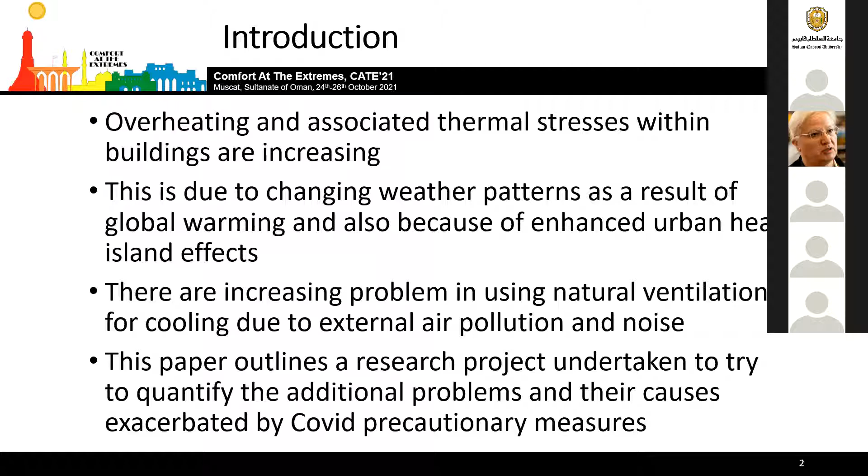What we're trying to present in this paper is an outline of a research project that we've tried to use to quantify the additional problems and their causes, exacerbated by the COVID precautionary measures. I think this really arises from the fact that although we've got various design techniques that can deal with overheating, when you add in the extra problems caused by COVID, this exacerbates the problems and can lead to very big difficulties.

Even before the COVID pandemic, concerns were being raised in the UK, and there were a number of other groups working on the area of potential overheating risk. It was pleasing to see the government had started some consultations on this. Unfortunately, I feel that maybe some of those improvements have stalled a little, and perhaps we're a little too cautious in the way we're dealing with this, which is why we instigated this project a year or so ago.

Already in the UK, we do have a number of analytical methods for trying to assess the problem of overheating, such as Technical Memorandum 59 from the CIBSE, the Chartered Institute of Building Services Engineers, which considers design methodology for the assessment of overheating risk.

But quite often the inputs to those overheating risk methods are based on a standard set of assumptions, which, when you add in the effect of COVID, were not really valid anymore and might lead to erroneous outcomes. So this is really why these assessment techniques, which were designed for a different set of circumstances, run the risk of not dealing properly with circumstances where we have COVID as well.

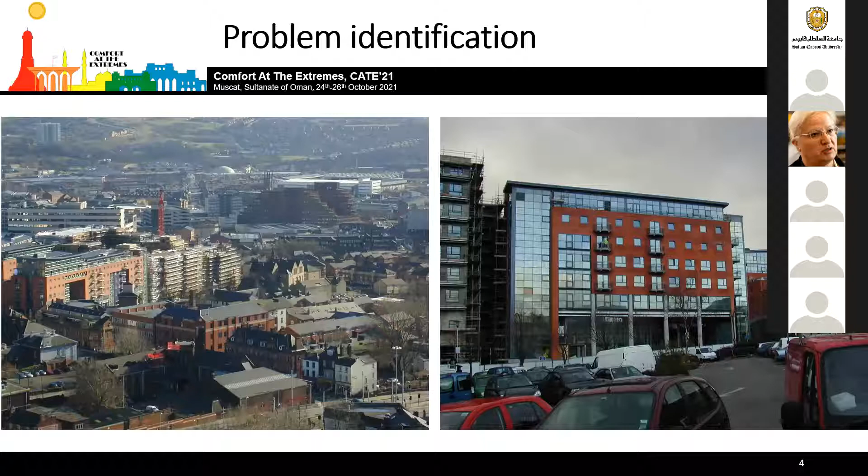Now, the sorts of buildings where we were most concerned were apartment blocks, the kind of building where it doesn't have to be very large, but one where a family might be located surrounded by other apartments, each of which would also be experiencing some kind of overheating. This, combined with the impact of perhaps single-sided ventilation and lack of air conditioning, which is very common in apartment blocks in the UK, would mean an increased risk of overheating in those apartments, particularly when we add in some additional factors.

Isolating at home meant there were some additional difficulties. More members of the family likely to be in the home for much longer periods, 23 to 24 hours indeed. And this, adding together with the additional heat gains that they would generate and the lack of availability of ventilation, led to a number of different problems.

Additional heat gains coming from more cooking, more use of appliances, and limited ability to cool the building from natural ventilation means, partly due to safety and security restrictions on openings. It's very common, in fact, for buildings in the UK that are apartment blocks to have restrictions on the size of the window that can be opened, thus limiting natural ventilation.

The reason for that is that it becomes a risk of somebody falling out. And in fact, we actually had somebody in our locality, a child fall from a window in an apartment block recently. So the reason for keeping those windows secure is very important. But also security, people becoming more concerned by the risks of burglary and other matters.

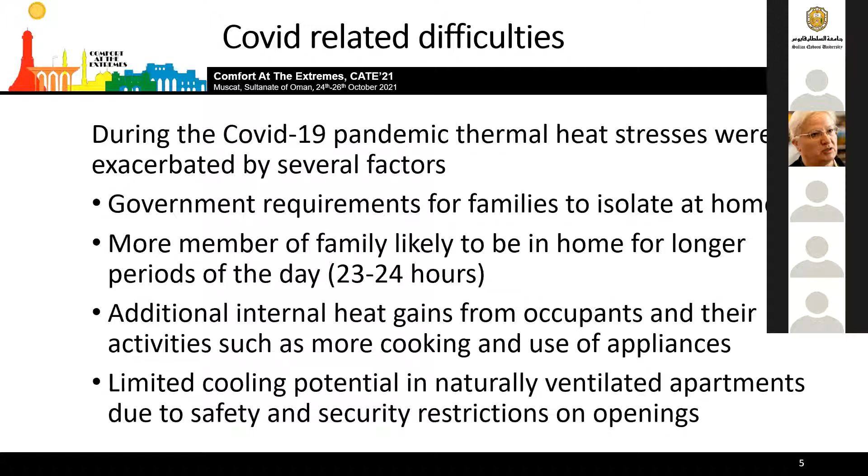So in order to carry out the analyses, which could identify greater detail from the impacting issues, we instigated a parametric study in which a number of different key features of the building apartment was varied.

We considered that the apartments would be ones in which they would be surrounded on all but one side. The side not surrounded is of course the one with the windows, the openings in it, but the other 5 sides of the building, the top, bottom, 2 sides and the back, would all be surrounded with temperatures at a similar level. We considered 1 and 2 bedroom apartments with typically 2 and 4 occupants.

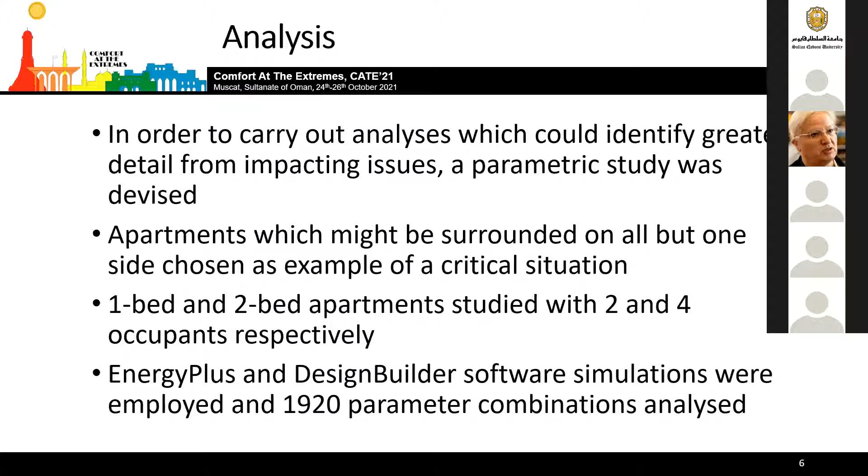And we used the programs EnergyPlus and DesignBuilder to carry out the simulations. And in total for this particular set of circumstances, we had 1,920 parameter combinations that were analysed.

The building we chose was not an extravagant one, it's quite a typical one, about 12 stories in height. We considered apartments situated facing each of the 4 principal directions, north, south, east and west. And we considered apartments on 2 different floor levels, the 2nd floor level and then the top floor level. Typically we had a 12-story building for this.

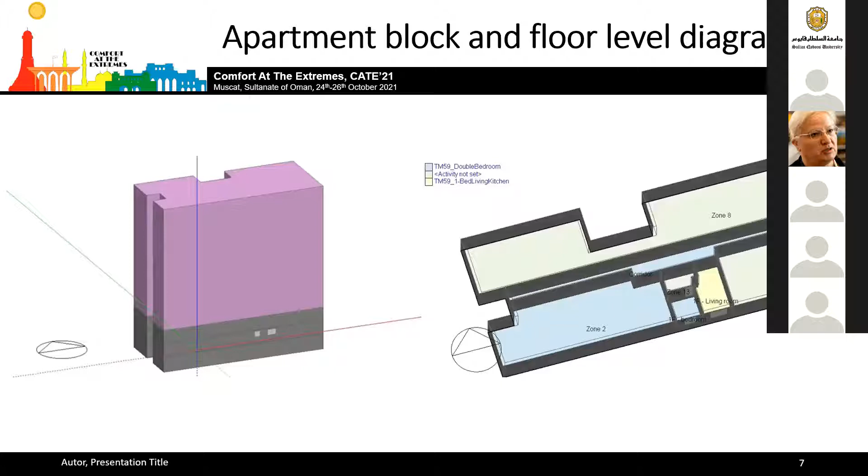One of the benefits of using an apartment block like this with multiple apartment options in it was actually in carrying out the simulations. We could carry out more than one simulation at a time by using different facades of the building and by using different floor levels. The reason why the 2nd floor was chosen is this represented an area where perhaps there was restricted ventilation because of surrounding buildings, and the top floor because it was more exposed to heat gain from the sun above.

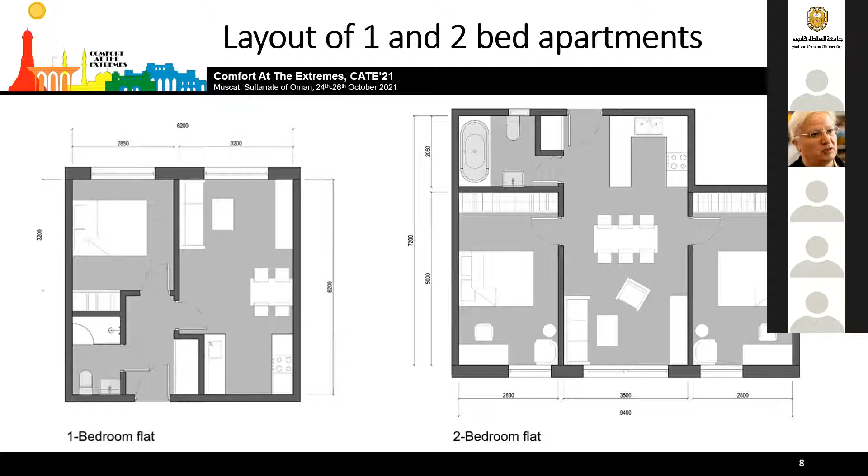The basic parameters for the layout of the apartments were chosen from a number of sources where apartments were described and instigated and used in real buildings. The 1-bedroom flat you can see on the left here has a window in the bedroom and a window in the combined dining, living, kitchen area. The apartment on the right, sorry, it's the other orientation, but you can see 2 bedrooms and also a linked area with the combined kitchen, dining area and living area. I know that this would not be common in all parts of the world, but for the UK, this is quite a common set of circumstances.

The different parameters that we looked at were 3 different city locations in the UK, London, Manchester and Newcastle, to give a breadth of different climate variations. We also looked at 2 variations in climate, the historic data from 1961 to 1990, and then the 2050 predicted data according to the 50 percentile high emission scenario.

As I already said, 2 apartment types, 2 locations in the apartment block, and different window variations with open windows in different bedrooms and so on. We also had lightweight and heavyweight construction variations and differences in leakage orientation and occupancy patterns. Heat gains were determined from glazing and internal gains from the people occupying the space.

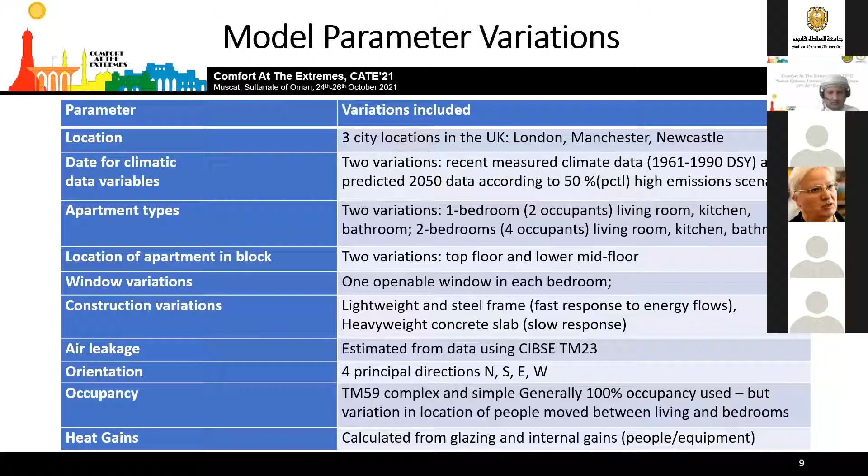The TM standards for vulnerable occupants were set, and unfortunately we found that almost all the circumstances where that particular set of standards were used failed the test. Overheating risk, particularly in the 2050 scenario, showed significant discomfort in almost all situations for the future weather. 20% of hours indeed were uncomfortable, with the top floor apartments suffering the highest risk, typically 15% greater overheating compared to the lower level.

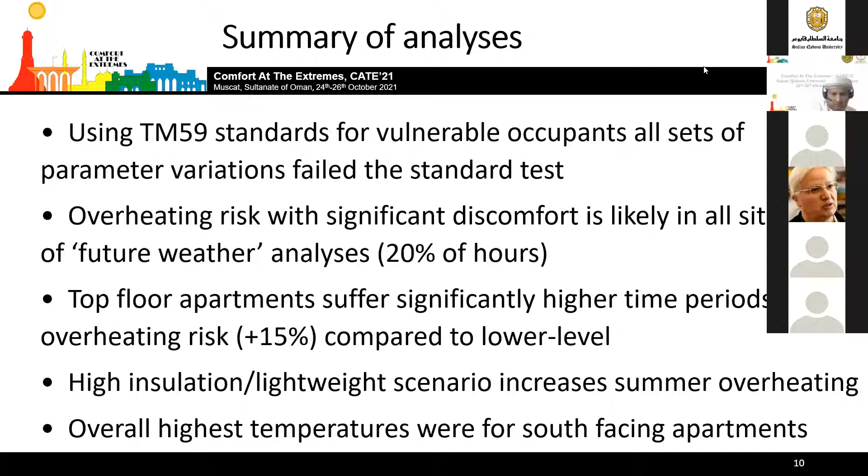The high insulation lightweight building scenario increased the summer overheating even further. And overall, the highest temperatures was for the south-facing apartments. This was a little bit unusual because normally you would expect for the west-facing apartments. But in this particular circumstance, it's the south-facing.

We used occupancy patterns typically used in existing assessments, but these were not adequate to allow for the increased occupancy due to COVID restrictions. So we had to change those to determine what the impact might be. There was an increase of internal heat gains, both from body heat of occupants and from other effects, like increased cooking.

There are several complexities in comparing the impacts of using these different assessment criteria from the technical memoranda. The standard way we would be assessing overheating basically failed to address the particular problems we had with COVID, and this needs to be addressed in future development of the standards.

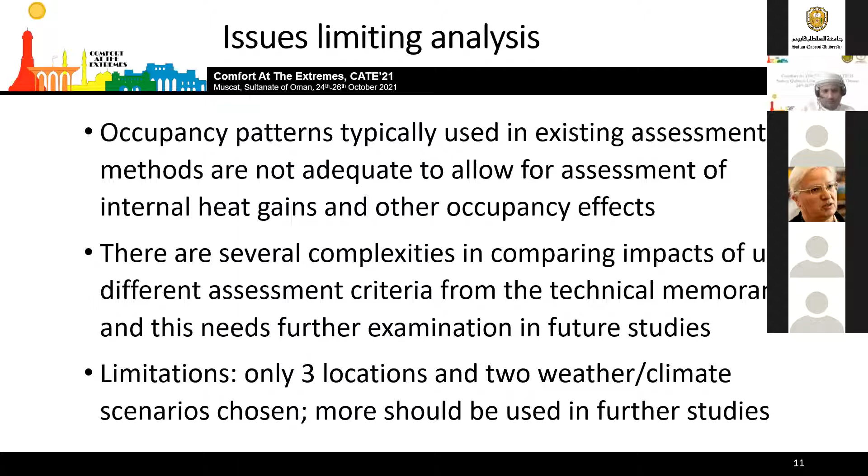We're also aware that we were only looking at 3 locations, but because they spanned from the north to the south of England, it gave us some ability to discriminate between what might be happening in slightly varying climates. But we do need to look at a wider range in the future.

The calculated temperature predictions did give us greater detail and therefore added value compared to the standard procedures. I think we would really recommend that an addition to the standard procedure is provided to cope with those kinds of circumstances we found ourselves in with COVID. Although the 3 locations were a limited number, we did think we got an overall indication of performance.

I think we would definitely suggest that the discomfort hours we standardly work with in the normal ways of predicting these things are not sufficient, because the observations we made, particularly during daytime occupancy of apartments, were not sufficient to allow us to estimate the overall problems. And if we're looking at the wider scenario in which potentially death and morbidity can increase as a result of higher temperatures, we need to enhance our way of understanding this particular problem.

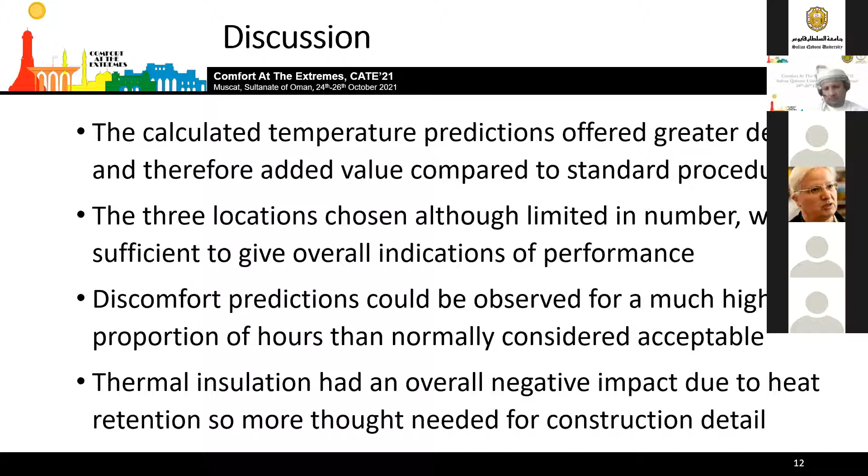The use of thermal insulation also had an overall negative impact, and this is a bit of a problem in the UK, given that at the moment we are attempting to improve our insulation standards. We need to be careful that in doing that, we don't create more problems than would otherwise be the case. So there needs to be more concern paid to technical detailing.

So we need more in-depth analysis, and we're partly doing that already, with a research student dealing with this, further ongoing work. We need to do some testing of real-world examples. Unfortunately, because of COVID, we were not able to measure in real buildings at the time of this parametric study, although we were using standard methodologies of simulation. But I think we do need to expand into testing of real-world examples.

Particularly, we need to align the analysis to the development of new codes for overheating, which is going on in the UK and elsewhere at the moment, and more sophisticated measures of assessing overheating risk, so that we can consider the particular circumstances, not just of COVID, but other factors which might impact on the way in which we're using the buildings.

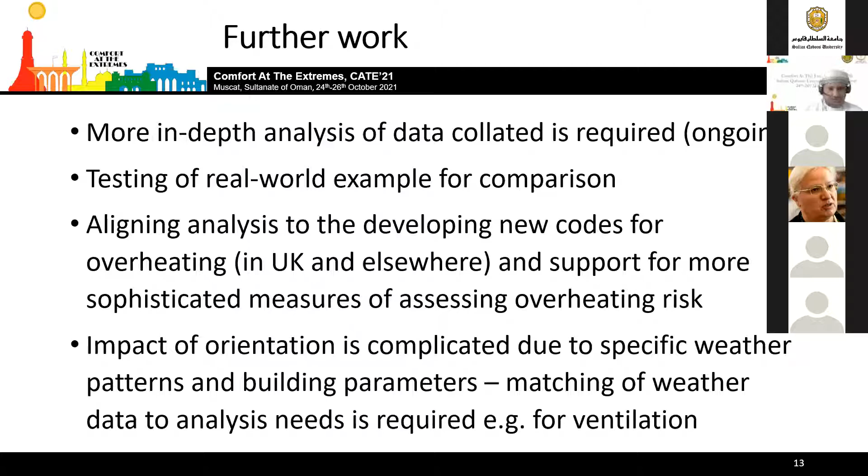Certainly, we can see the impact of orientation is complicated due to specific weather patterns and building parameters, and the matching of weather data to the analysis needed, particularly in terms of ventilation. That's quite difficult to incorporate into the way in which the analysis moved forward. We could see from the way in which we had to put together particular input data that this needs more help. And I think I've more or less run out of time.

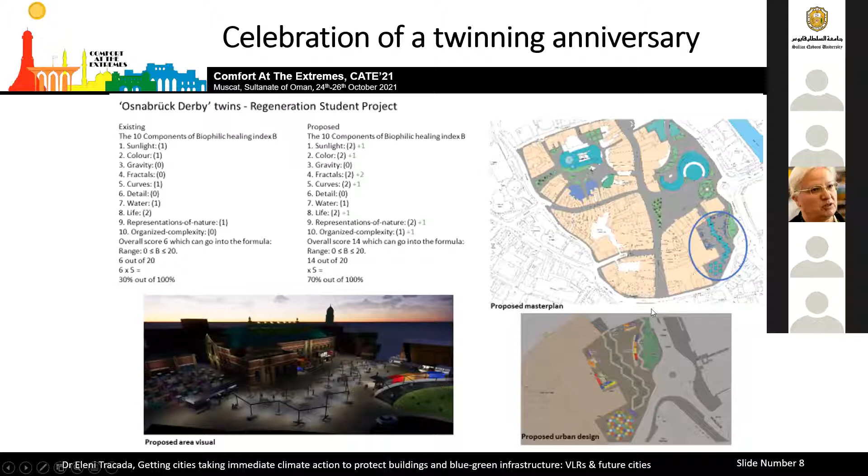Then students considered and showcased, with photo elicitation to people, different ideas for their project to add sunlight in the main piazza, as you see, and fractals, meaning flow without barriers, and so on, managing to get 70% of 100%. It's a very difficult area though, because to go to 80 or 90%, we also have to consider that the surrounding traffic has to be completely dismantled.

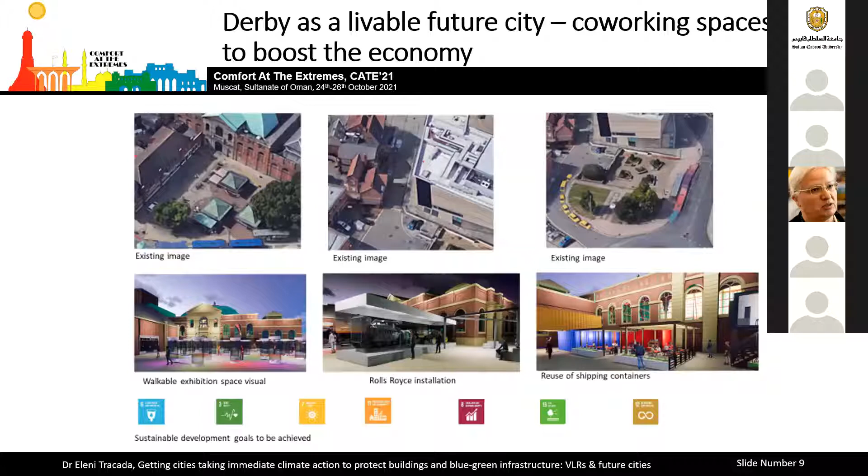So these are ideas that the student put forward for the central marketplace and the central part of Derby—co-working spaces to give people more life there, because it was a lifeless place most of the time. And as you see underneath, they're also promoting different things about the sustainable development goals that the council should put in place in the new master plan they are going to implement, which won't change up to 2030.

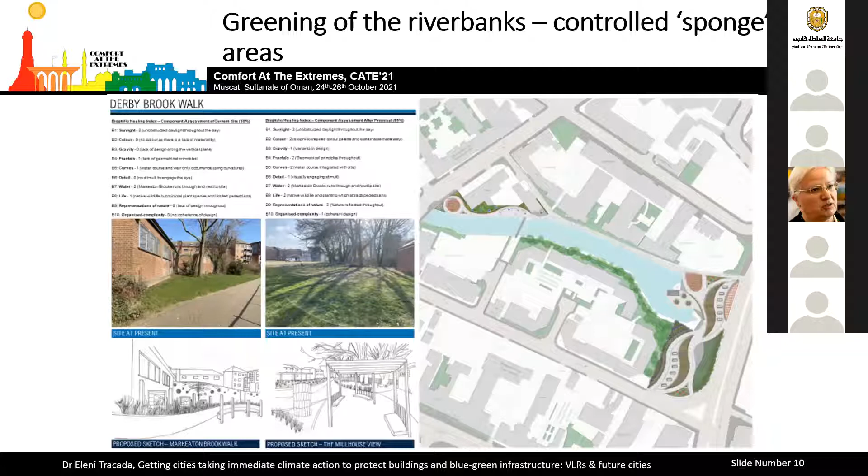Work has been done by students revamping different natural features that have been underneath Derby. These works took place just before and after World War II, like revamping brooks and creating nice walks in the city, making the city more walkable.

You can see that along the river, the existing situation is not a safe place, especially in the evenings and even in the day, because there are several things that are not attracting people, and these path alleys are not usable by people.

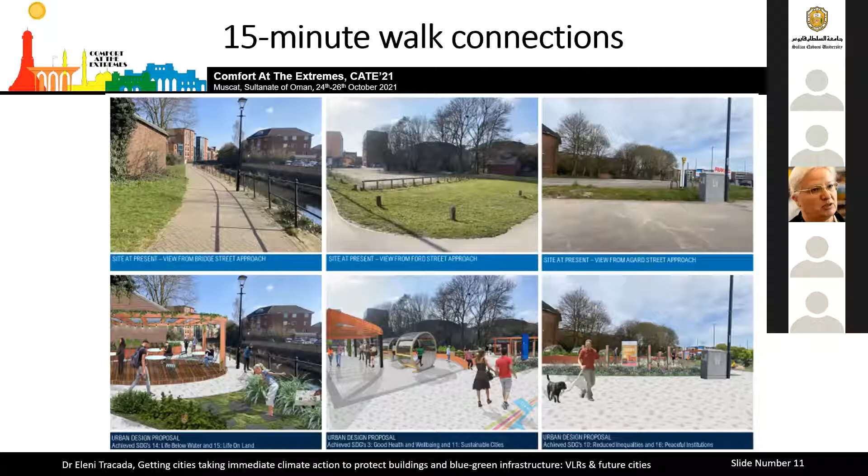So the students added more life, more green space, also gardens that create a sponge city environment, just in case we have an overflow river.

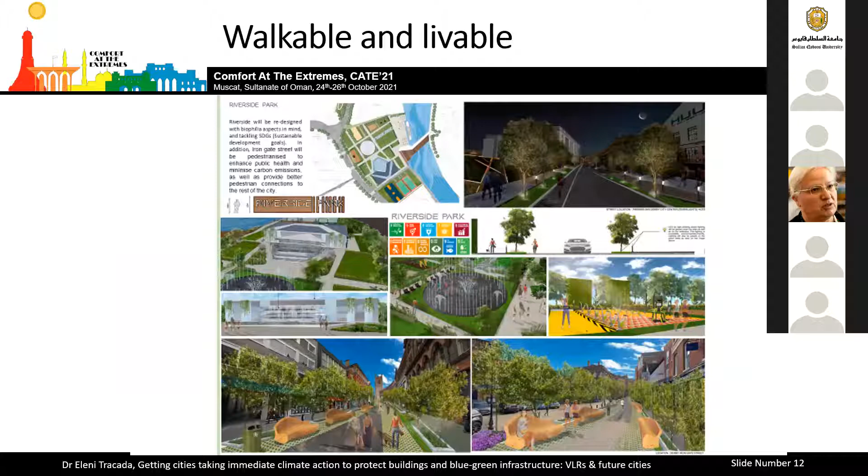There are again different views showing the existing situation and how it is completely transformed with green infrastructure, blue infrastructure, and also the consideration students did with colleagues from biodiversity to extend the greenway, so biodiversity in the city is not disrupted, because we've got biodiversity at the edges towards the Derbyshire Dales, but not inside.

Then this student did a lot more work looking at Darley Park, which is a beautiful park if it is revamped in a way that people can see it as an urban biophilic space.

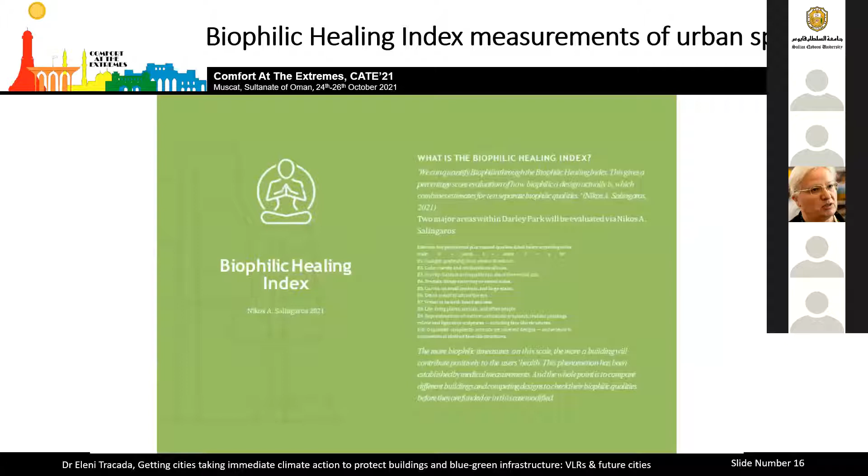So he did a lot of research there, helped with another couple of students, looking at the opinions of the people, using the biophilic index as well to indicate different things about this Darley Park, which is a big, huge park, not very far from the green space, from the central part of Derby.

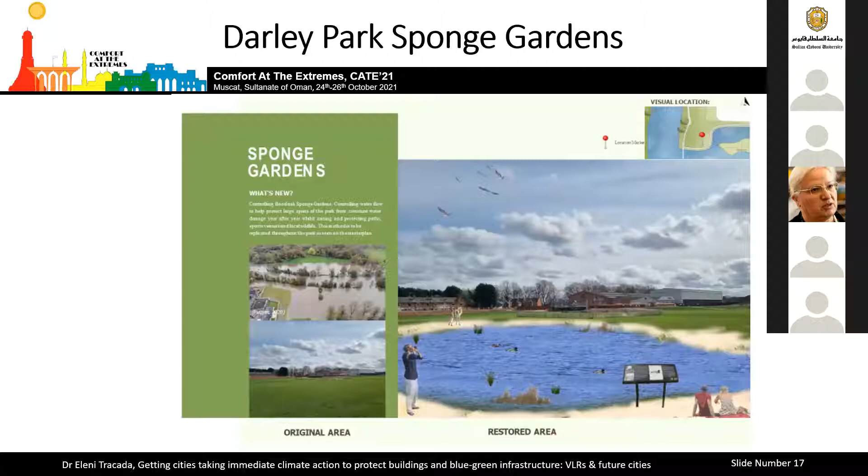It should be a great idea for especially people working in Derby to enjoy different things there. So the final plan provides also a boat, like a small bus boat, to take people from the central part of Derby to that park and use it in various ways.

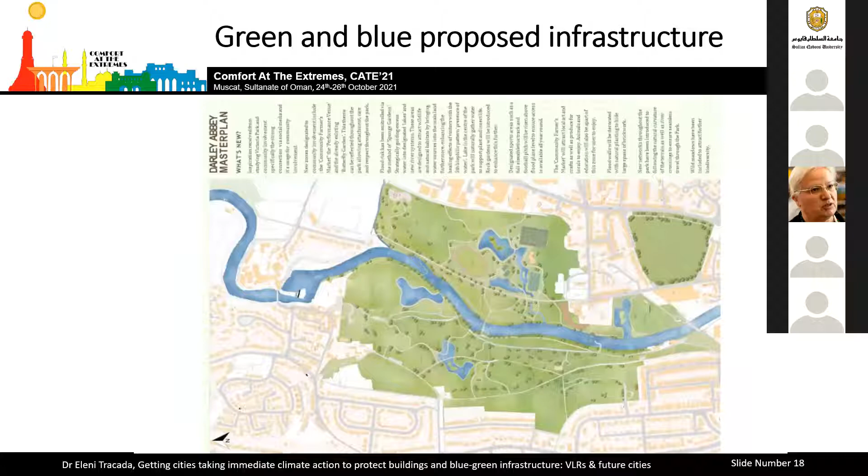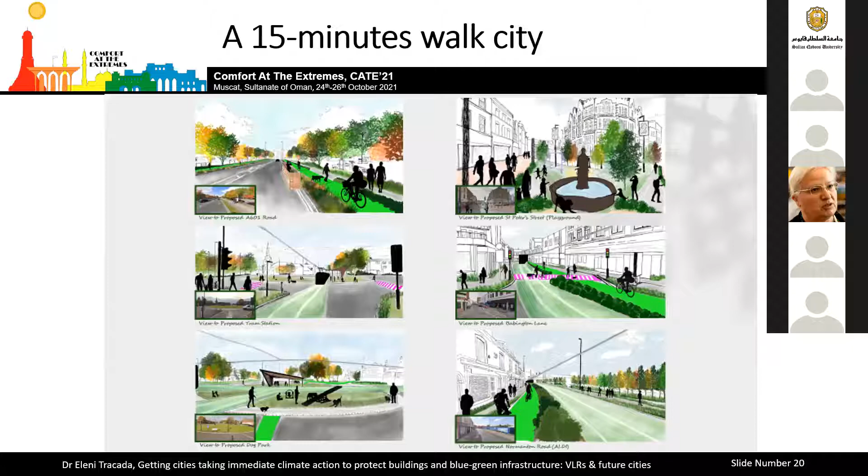These are ideas also promoting green along the streets and promoting streets that can be walkable and can also integrate transport, which gives you the famous 15-minute walkable cities nowadays.

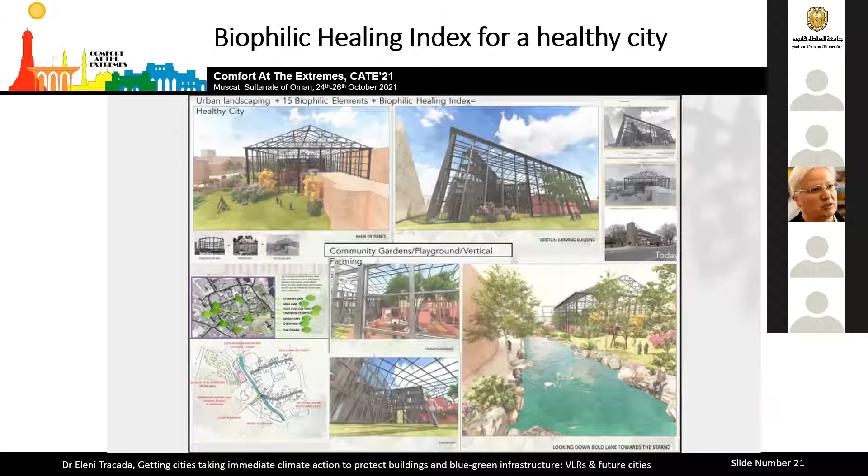And again, revamping all the streets to bring back all the green space and blue space that is being lost, but in a way that creates communication through the city and creates itineraries for citizens and the people who live there.

There are more views of cities, and if you visit these streets now, they don't have anything very attractive unless the environment is going to be changed.

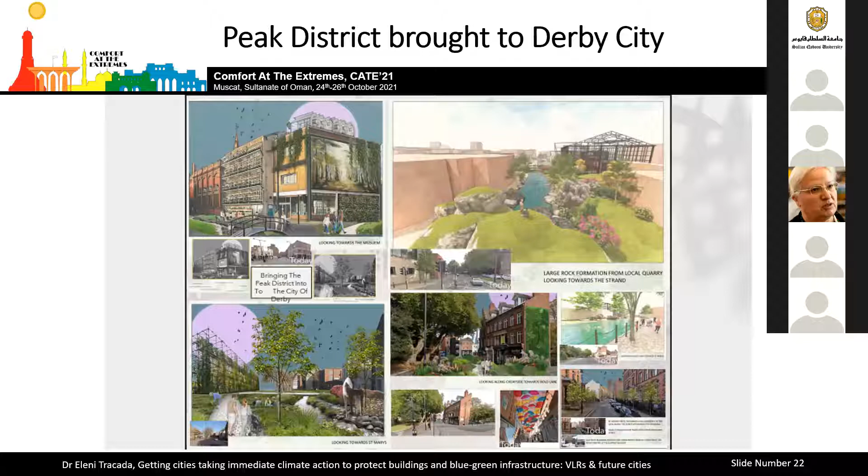So the promotion also is, as I said, evidenced in mapping of where these priorities should be, like creating another layer of the master plan by showing priorities.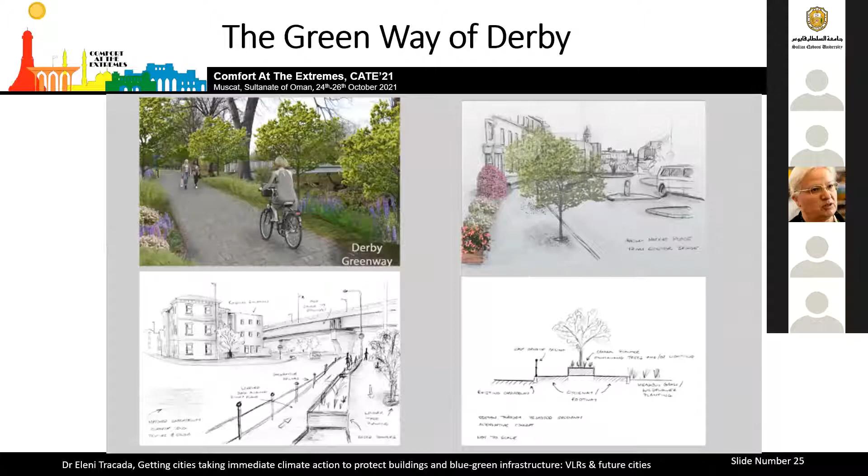In the meantime, people would like to see these things because they feel extremely stressed and stretched with what they have faced, especially with the latest lockdowns.

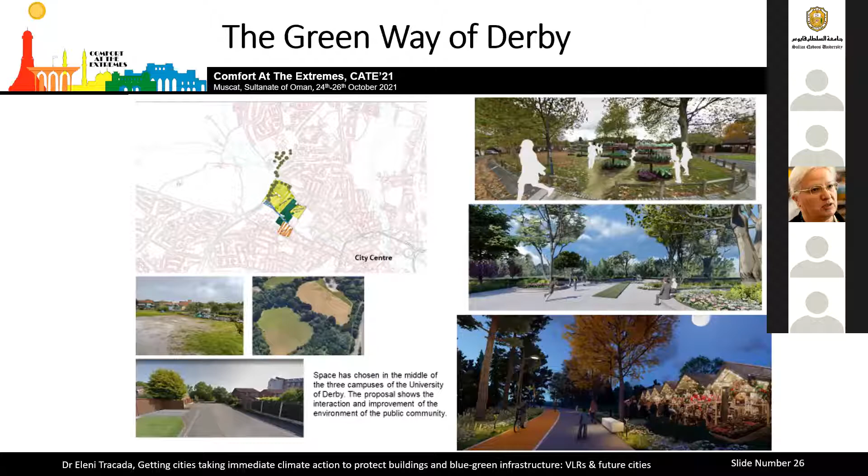These are areas also nearby the university, which is practically cut off by a main road, the A38, a very busy road. Now heritage and highways are planning to put that stretch underground, or maybe a smaller channel underground just for servicing the city, deviating all the traffic, and giving the space on top to communicate between another green park there.

So I'll stop here. We are doing research with the Biophilic Index, and we are planning to validate this tool, like a framework tool, for planning, but also extending to the built environment itself, because we think biophilia should be a combination of indoor space and outdoors together, working for the citizens of the cities.

So I shall stop here, and thank you for your attention.

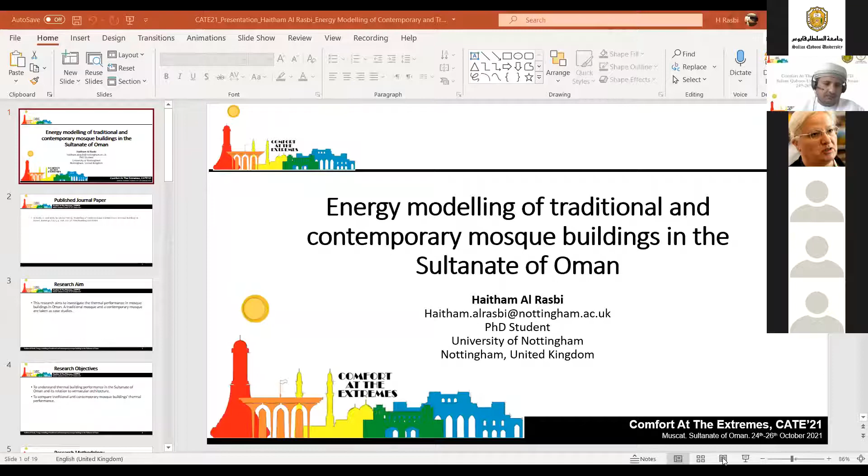Today I'm going to present our paper, Energy Modeling of Traditional and Contemporary Mosque Buildings in Oman. I'm a PhD student at the University of Nottingham, not far from Derby, where Dr. Eleni is from.

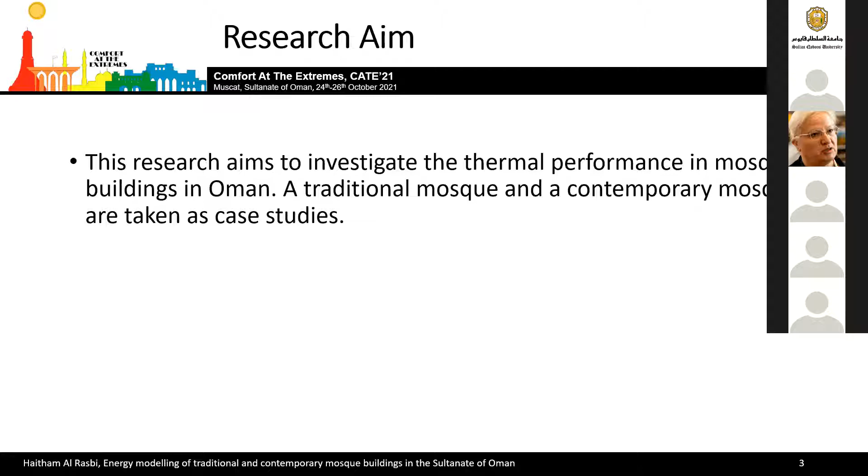This paper was published in July 2021. The aim of this research is to investigate the thermal performance in mosque buildings in Oman. We compared a traditional mosque and a contemporary mosque, both taken as case studies. The objective is to understand thermal building performance in Oman and its relation to vernacular architecture, and to compare thermal performance between traditional and contemporary mosque buildings.

Why did we choose mosques? We chose mosques as case studies here in Oman because they have a very simple plan and layout, typical across all mosques, which makes comparison easier. Mosques also have easy access, so they're easier to research.

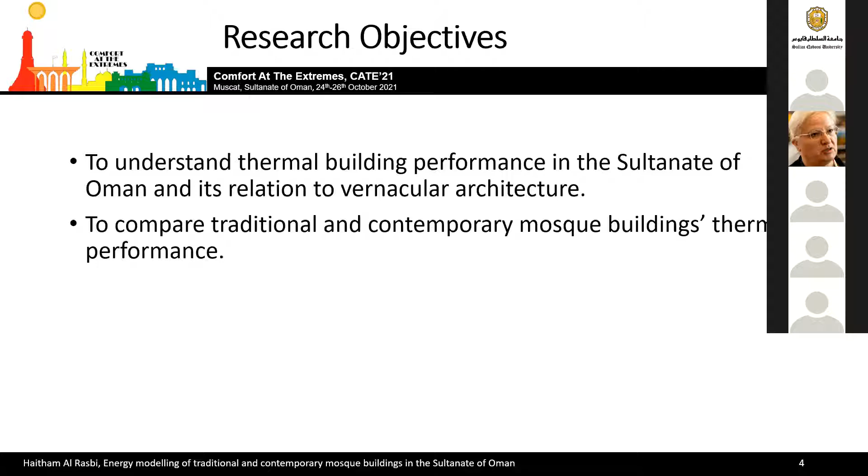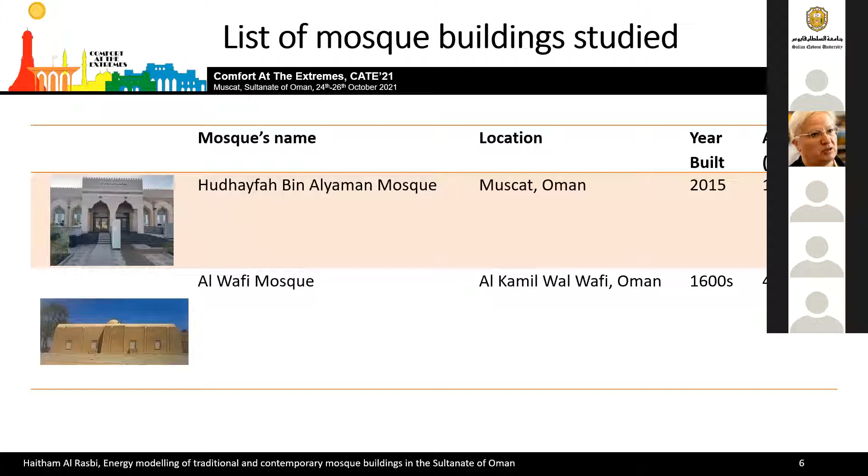We studied two mosques: Hudhayfah Bin Alyaman Mosque in Muscat, built in 2015, and Al-Wafi Mosque, which is around 400 years old. Those are the two mosques we studied and compared.

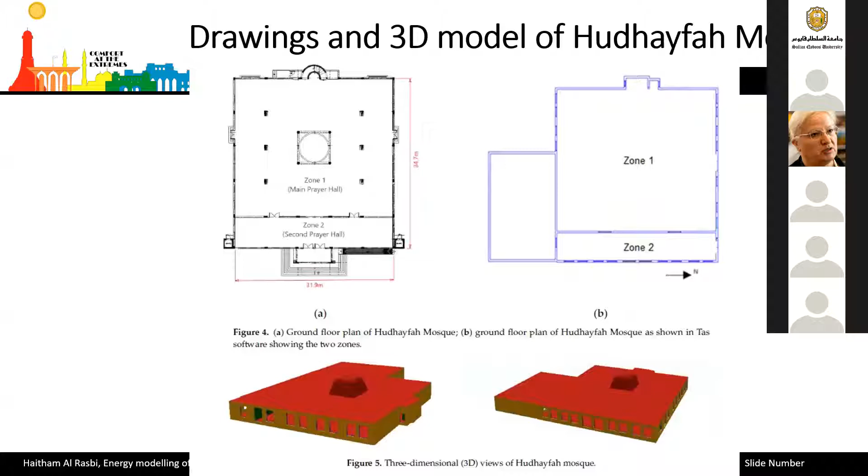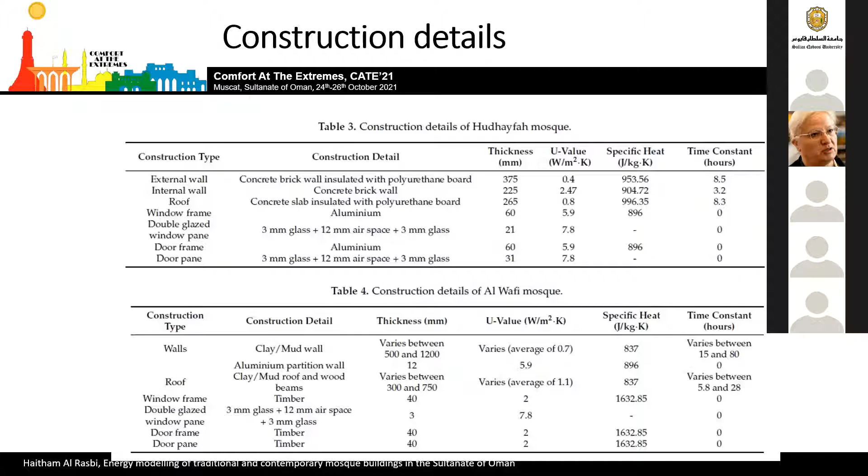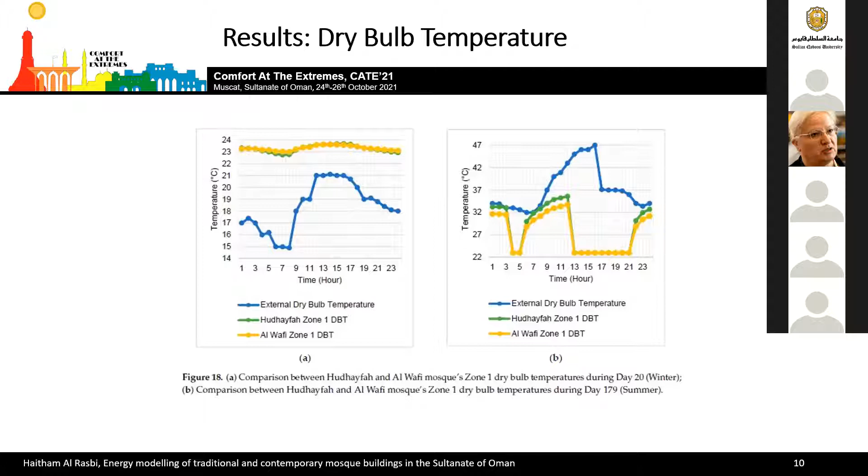We also looked at the loads breakdown. I don't want to go into too much detail, but I want to highlight that there are many thermal loads we studied, and we looked at the highest loads affecting the two mosques.

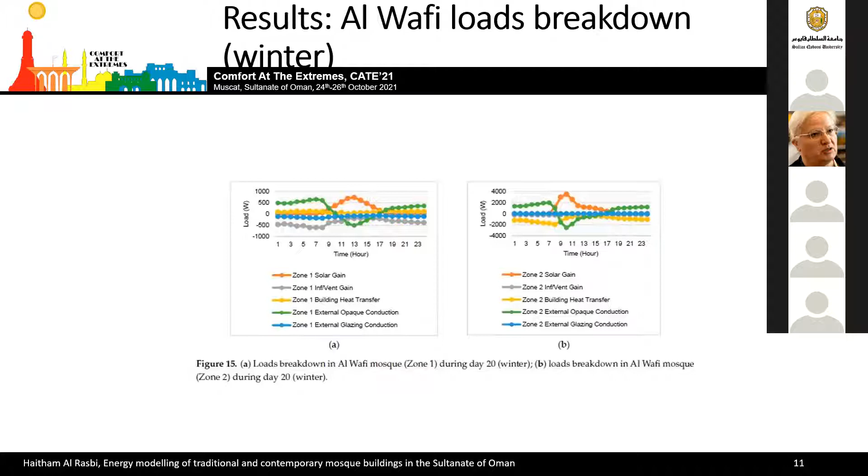For Al-Wafi Mosque during winter, the most notable thermal loads are the solar gain and external opaque conduction. During summer, the most notable thermal loads are sensible load and external opaque conduction.

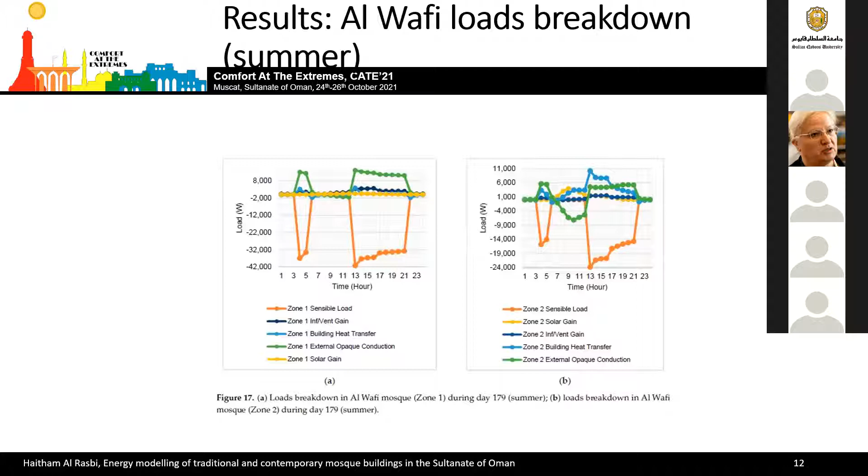For Hudhayfah Mosque, it's similar to Al-Wafi as well: solar gain and external opaque conduction. As you can see by the amber line, it's the solar gain, and the green line is the external opaque conduction.

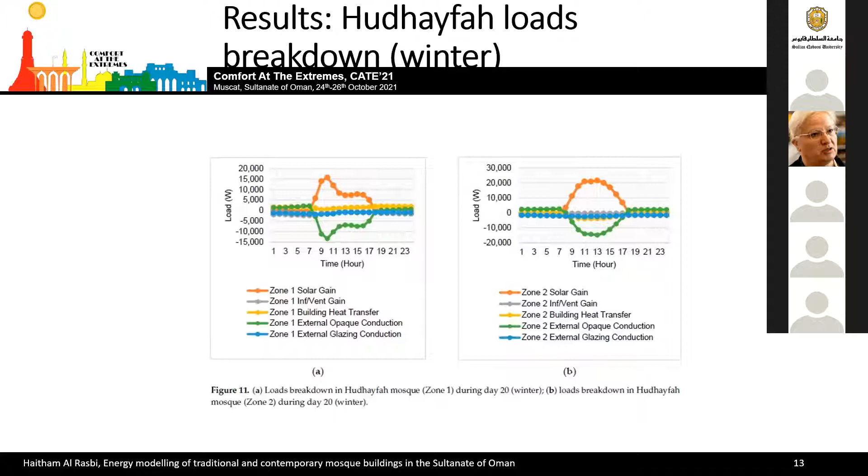Also for Hudhayfah Mosque during summer, similar to Al-Wafi, the most notable thermal loads according to the simulation are the sensible load and external opaque conduction.

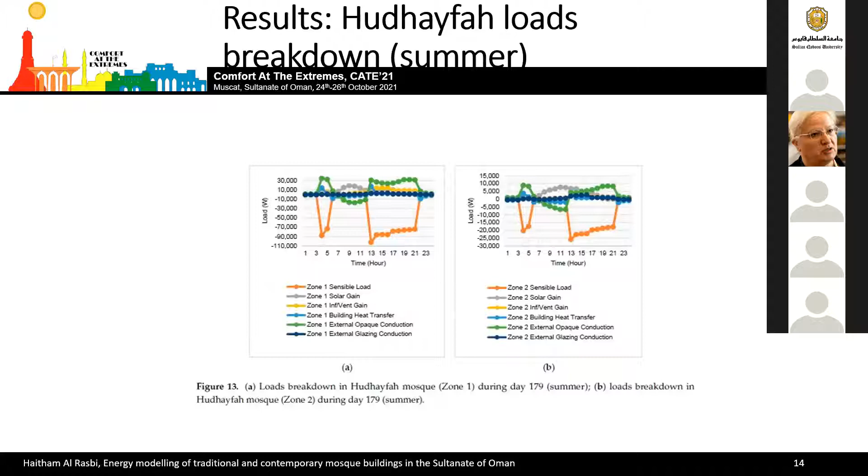So in summary, for both mosques we noticed that solar gain, external opaque conduction, building heat transfer, and sensible gain are the highest thermal loads.

According to this simulation and previous literature, potential improvements include modifying the glazing ratio, modifying the building envelope such as the U value or changing the material of the walls and roof, and also changing or increasing the thermostat set point.

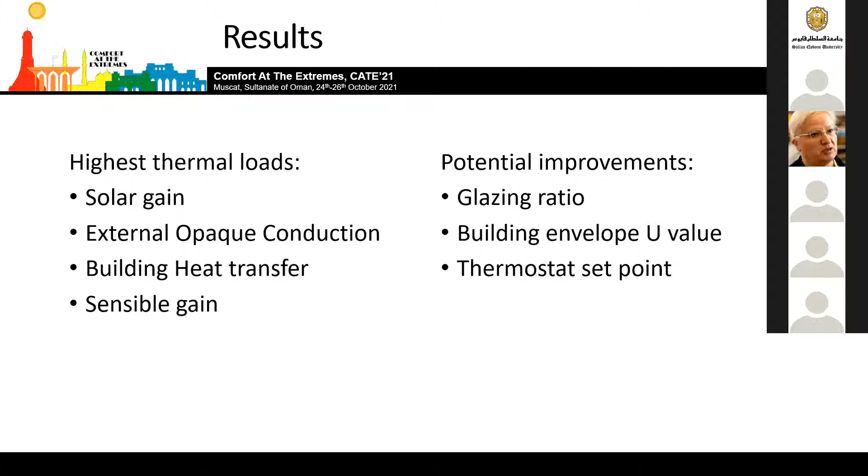So after that, we ran the simulation again for both mosques, Hudhayfah and Al-Wafi, seven more times for Hudhayfah. Each time we changed something to improve or alter the building. For example, in the first case for Hudhayfah Mosque, we halved the glazing ratio, then doubled the glazing ratio for the second case.

For the third case, we reduced the U value from 0.8 watts per meter squared Celsius to 0.4. For the fourth case, we also reduced the U value for the external walls. For the fifth case, what we did for Hudhayfah Mosque was exchange the material - instead of concrete, we changed it to mud wall.

For the sixth and seventh cases, we increased the thermostat set point by 1 and 2 Celsius - same cases we did for Al-Wafi as well. What we noticed here is that the change in cooling load, the most reductions were yielded by the third case and fourth case in Hudhayfah Mosque, which are reducing the U value. For Al-Wafi Mosque, it was mostly reduced by the thermostat set point increase by 1 or 2 Celsius.

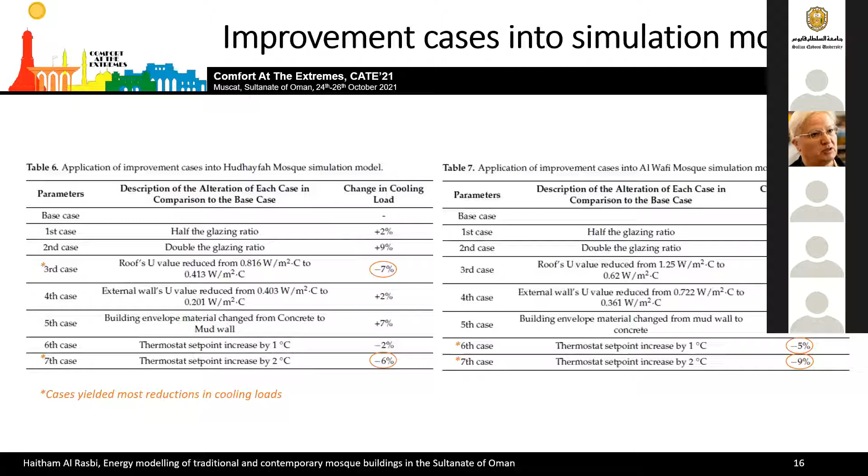So in summary, as per the results, the roof's U value reduction and the thermostat set point increase by 1 or 2 yielded the most cooling load savings - up to 9%. Of course, we can mix and match between those techniques. For example, if we did both reducing the U value of the roof and also increasing the thermostat set point by 1 or 2, it will yield maybe up to 14%.

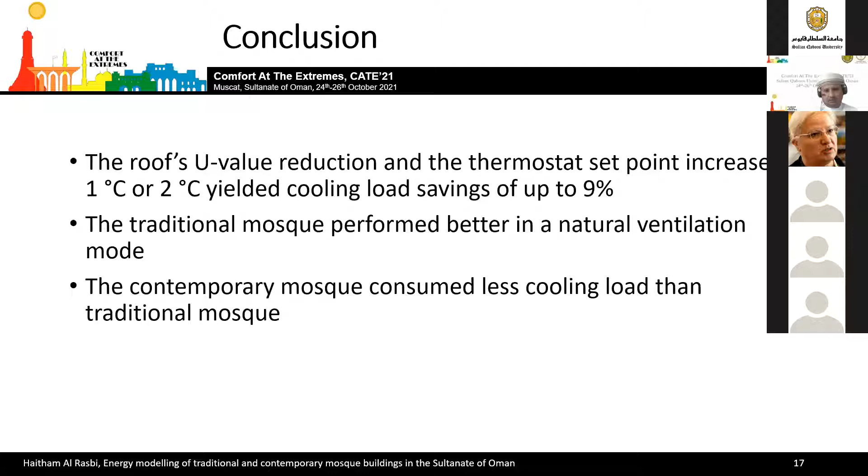Another result we came up with: the traditional mosque performed better in natural ventilation mode. The contemporary mosque consumed less cooling load than the traditional mosque as well. So that's all, that's it for us. If you have any questions, please let me know.

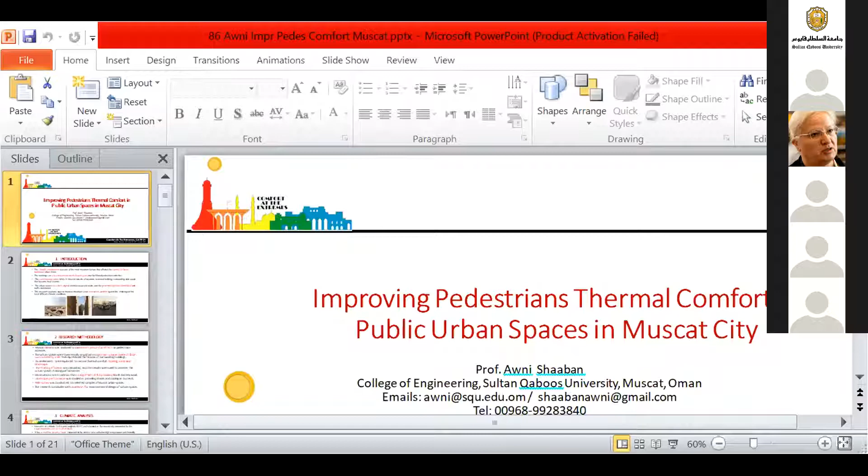I'm a retired professor from Sultan Qaboos University this year. I have a Bachelor of Architecture from Liverpool University, MSc from California, and PhD from Texas A&M. My research interest is building environment and green architecture. So I'm starting my presentation.

To improve pedestrian thermal comfort in public urban spaces in Muscat City. Dr. Saleh, would you remind me halfway through, so I won't exceed my time? Okay, do you hear me?

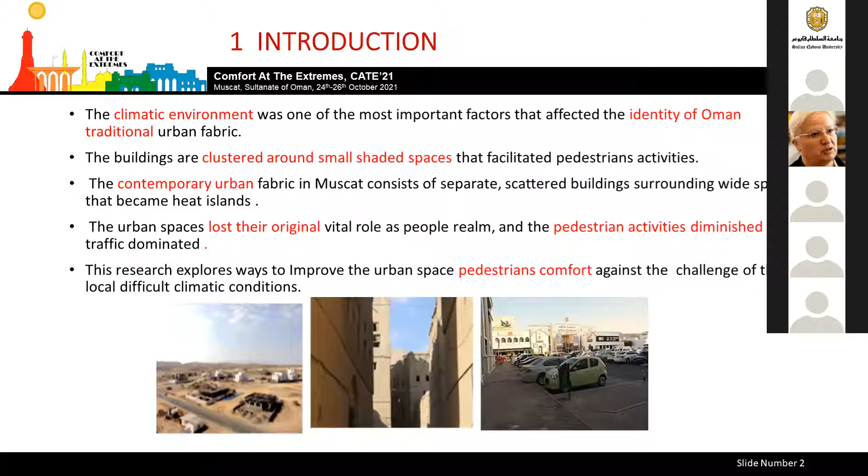Yes, yes, okay. Well, I see the climatic environment as a very important factor in identifying Oman traditional architecture - building relates to that. But on the other hand, the contemporary urban fabric is separate, scattered buildings with wide spaces, and the urban space lost its original role of people's realm to automobile realm. So hopefully this research explores ways to improve the urban space pedestrian comfort against the challenge of the local climate.

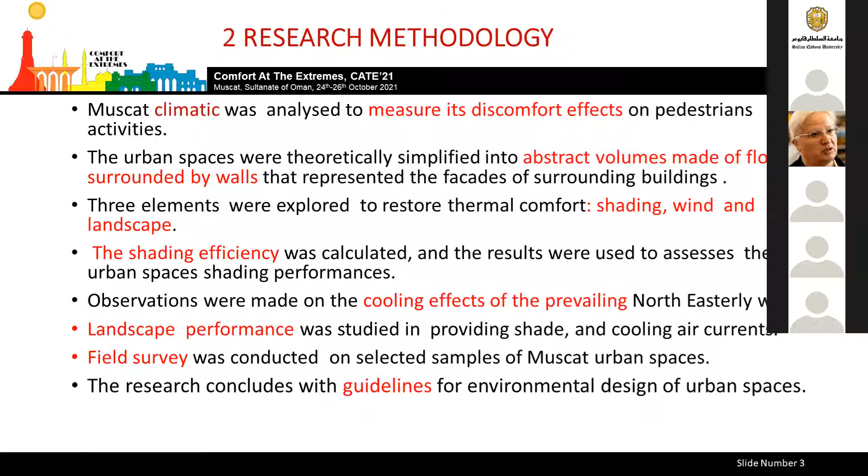The urban spaces were theoretically simplified into abstract volumes made of floors surrounded by walls that represent the facade of surrounding buildings. Three elements were explored to restore thermal comfort: shading, wind, and landscape. The shading efficiency was calculated and used to compare urban spaces. Observations were made on the cooling effect of prevailing wind, and the landscape was also studied. A field survey was conducted on a selected sample of urban spaces in Muscat, and ended up with design guidelines.

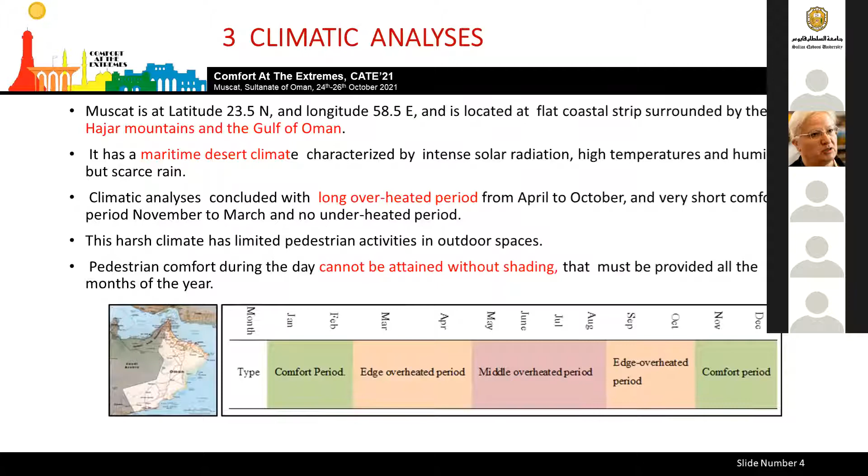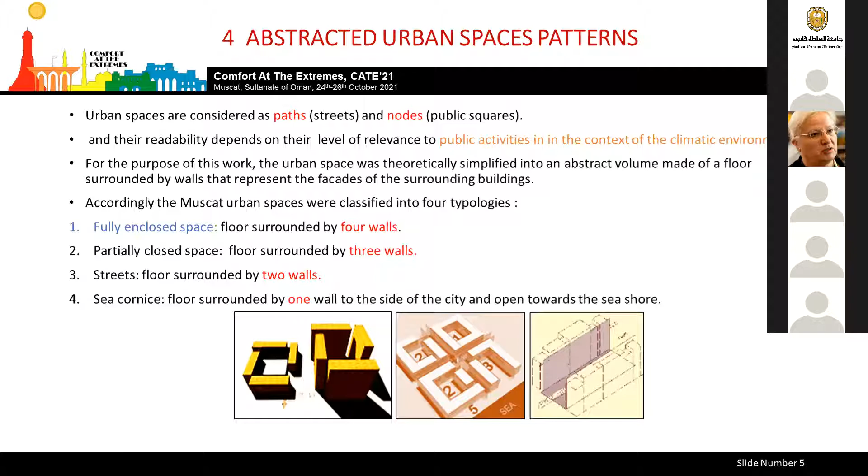As I said, three items were presented as a theoretical basis: the effect of shading. I put the geometric configuration of an urban space, described by proportions of height to width and length, and classified them into two types: deep urban space where height is greater than width and length, and shallow urban space where height is less than half the width and length. Then shading efficiency was calculated and shading patterns were plotted.

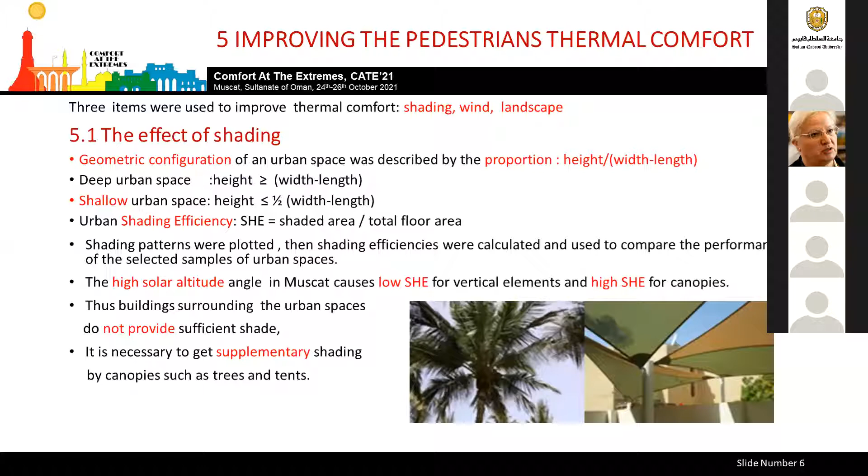One of the initial problems I found is that due to the high solar altitude in Muscat, it causes low shading efficiency for vertical elements and high shading efficiency for canopies, horizontal elements. So it is necessary, especially in shallow spaces, that we must have supplementary shading support by canopies.

As far as the wind is concerned, the surrounding buildings must be planned in a way to create positive and negative pressure to maximize wind flow. Improvement of wind flow must be achieved by inserting gaps in a prescribed locations between buildings.

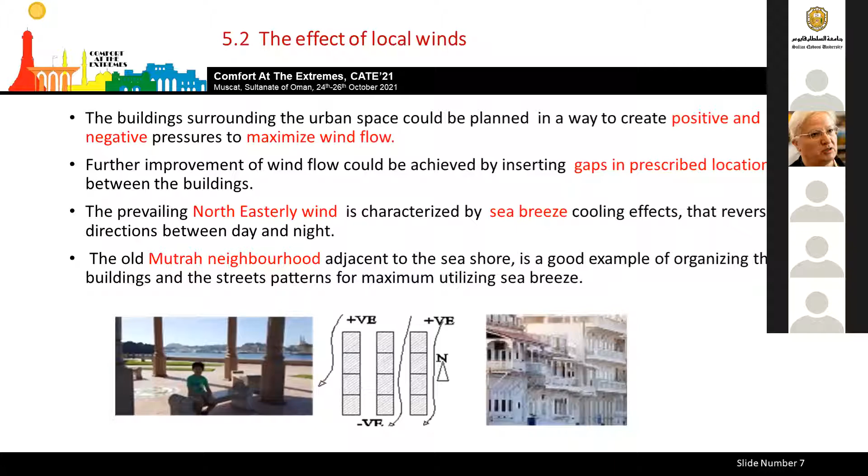We have in Muscat the prevailing northeasterly wind. It is a very important character. It has a sea breeze cooling effect that reverses direction between day and night. I look at Mutrah neighborhood, an old neighborhood, as a good example for exploiting sea breeze.

As far as the landscape, I classified landscape floors as hard surfaces and soft surfaces. The relative proportion of these surfaces is given by hardness ratio, HR, equal to hard surfaces to soft surfaces.

Hard surfaces absorb and store much of solar heating radiation, while green dissipates it. But the problem is it's very difficult to maintain green areas in Muscat due to high air temperature, intensive solar radiation, and mainly water scarcity. So although we wish to have green spaces, we cannot have them. Therefore, a critical balance must be struck between both.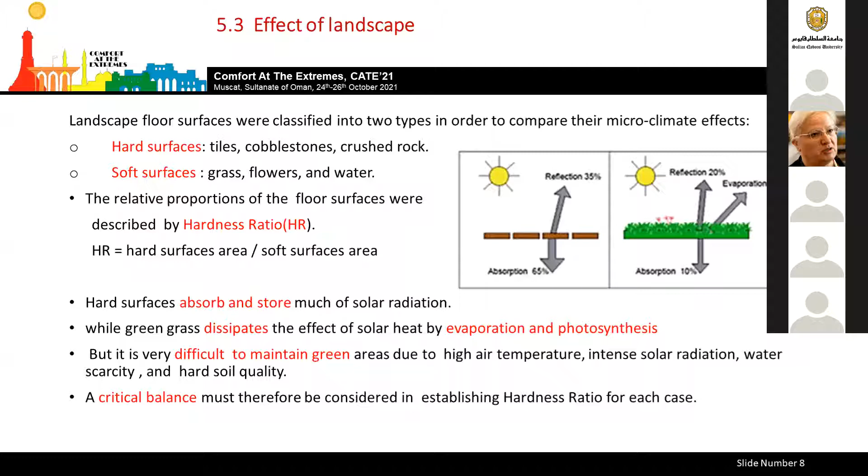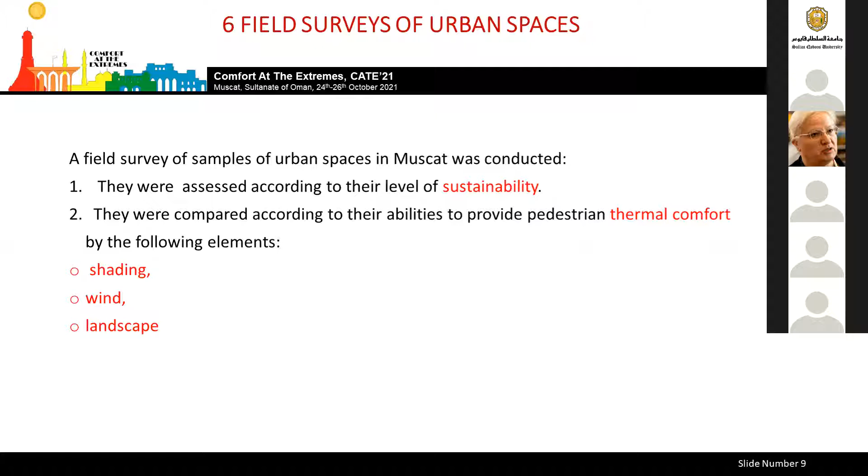The field survey was conducted on selected samples, assessed on two issues: their level of sustainability, and how they compare in relation to thermal comfort using the following elements: shading, wind, and landscape.

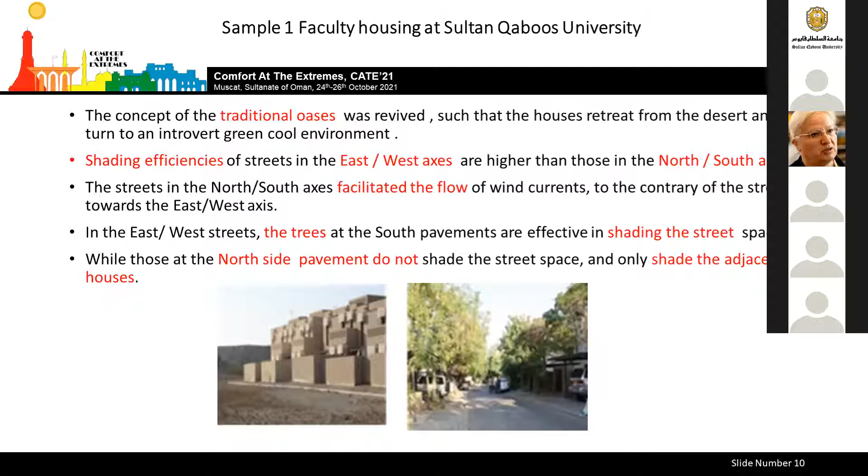The streets in the north-south axis facilitated the flow of wind currents, contrary to the others. In the east-west streets, as you see in this diagram, the trees at the south pavement are effective in shading the street. On the other hand, the trees on the north side pavement do not present sufficient shading.

The second sample is the academic building space in Sultan Qaboos University. Here, the shading efficiency is low because the floor is large, surrounded by low buildings. The buildings at the east and west edges provide the highest floor shading efficiency, while the southern building provides low shading.

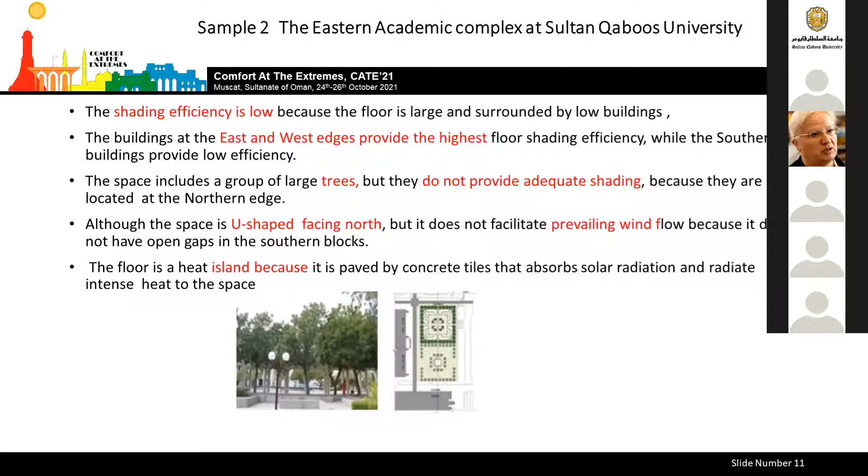The space includes a group of large trees, but they do not provide adequate shading because they are located in the north. Although the space is U-shaped, facing north, it does not facilitate prevailing wind flow because it does not have open gaps, as I said earlier. Therefore, the floor is a heat island because it's paved by concrete tile that absorbs solar radiation and radiates heat to the space.

The results of the selected model can be discussed as follows: their level of sustainability and ability to respond to climate challenge, and third, their capability to provide pedestrian comfort by employing, again, the three elements.

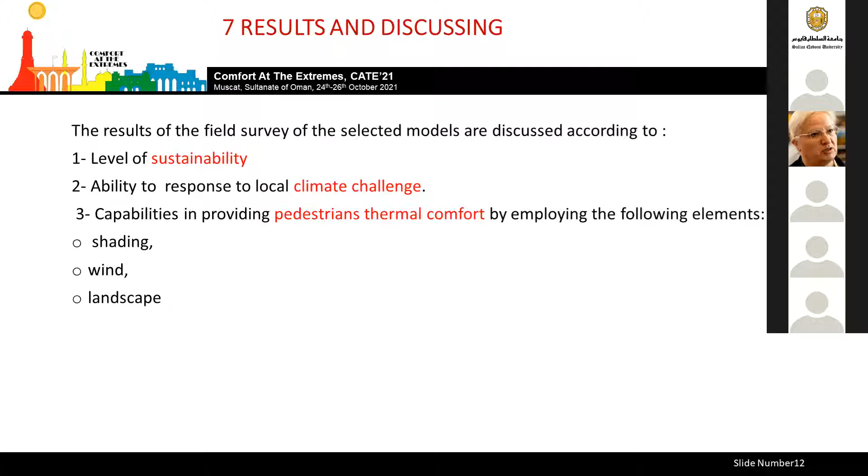We conclude in the discussion that a few urban spaces in the sample have deep configuration and do get adequate shading, but the majority are shallow configuration and do not get sufficient shading.

The effect of the surrounding building on the shading efficiency can be rated in the following descending order: east, west, south, southeast, southwest, northeast, northwest, and north.

The shading effect of eastern and western blocks surrounding the urban space is maximum in the morning and afternoon, and minimum at noon. The southern building blocks, on the other hand, provide continuous but rather low shading throughout the day. Shading efficiency is highest in urban spaces with elongation along the north-south axis, and lowest when elongation is in the east-west axis.

The high solar altitude angle in Muscat causes canopy to provide higher shading efficiency than walls. Therefore, buildings surrounding shallow urban spaces cannot provide sufficient shading, and it is necessary to provide supplementary shading by trees and tents.

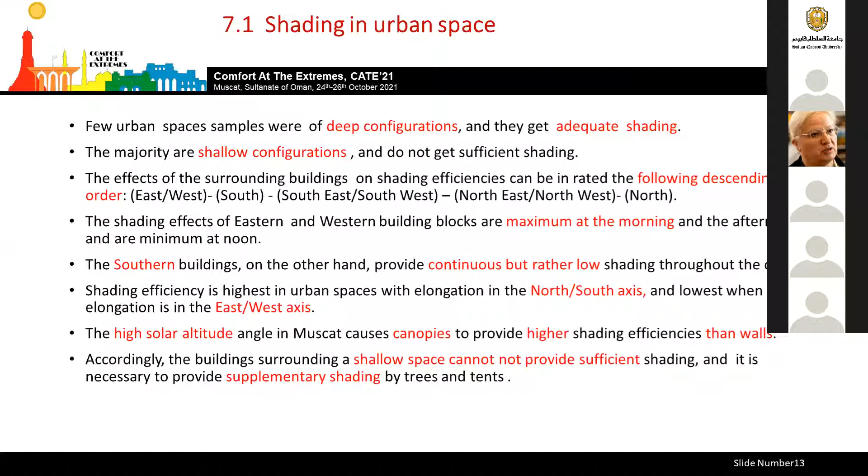As far as wind benefit, I found that fully enclosed urban spaces suffer from air stagnation and loss of cooling effect. Semi-enclosed urban spaces in U form allow wind flow. Buildings around some urban spaces have inlet and outlet gaps that create positive and negative pressure, inducing wind currents to the middle of the space. Also, groups of trees were placed at the edges of some urban spaces to redirect wind.

Yes, you have three minutes. Okay, fine.

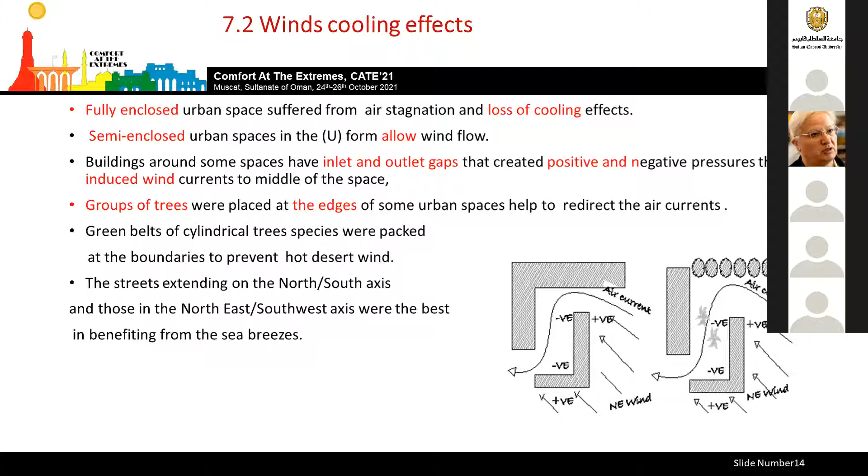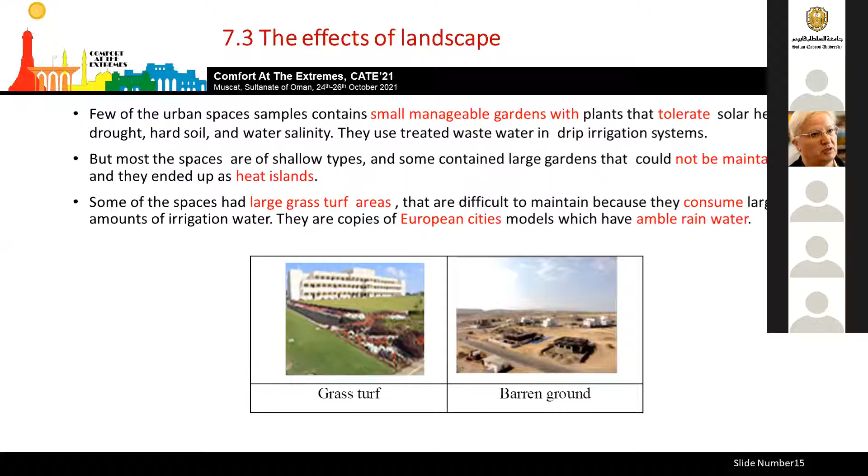As far as the landscape, only a few urban space samples contain small manageable gardens with plants that tolerate solar heat gain. But most of the spaces are shallow type and contain large gardens that cannot be maintained. Another problem: some spaces have large grass turf, which is also difficult to maintain because of its need for water.

So this is the crucial point. Some spaces respond to the challenge of water scarcity with greater hard urban spaces. We have no choice. However, the hard spaces were shaded by trees to reduce solar impact.

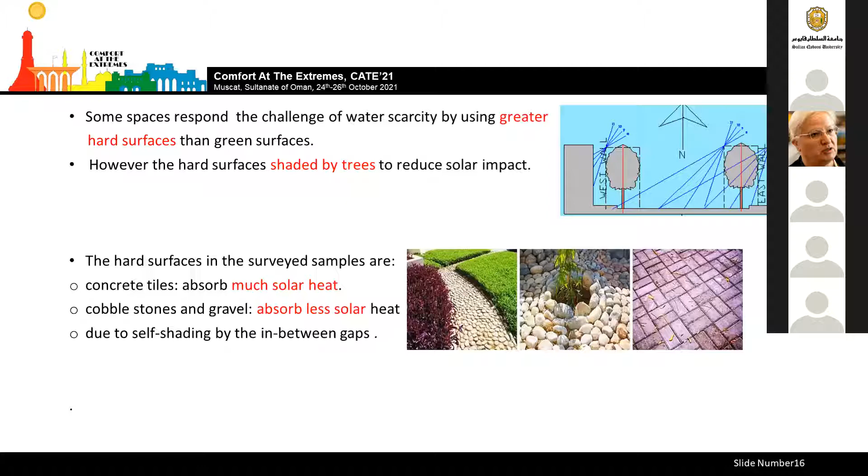The types of hard space samples include concrete tiles, which is not good as it absorbs much solar radiation. We also have cobblestone and gravel, which absorb less heat because of the self-shading effect due to the gaps in between.

It can be concluded that the urban spaces in Muscat may be classified into unsustainable shallow spaces and sustainable deep spaces. The unsustainable urban spaces are mostly shallow with a proportion less than half the width to length. Some contain large areas that were difficult to maintain. They are mostly closed urban spaces. Pedestrian activities were diminished, and a problem is that many urban spaces changed their role from people realm to automobile. Actually, some were turned into parking areas.

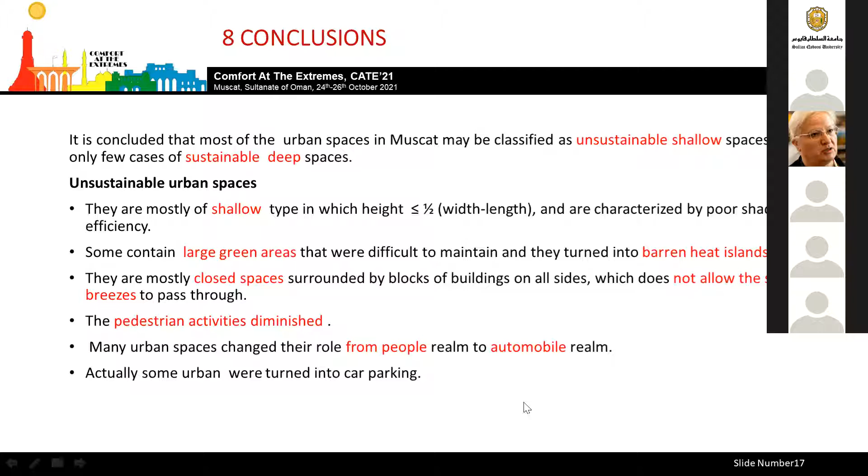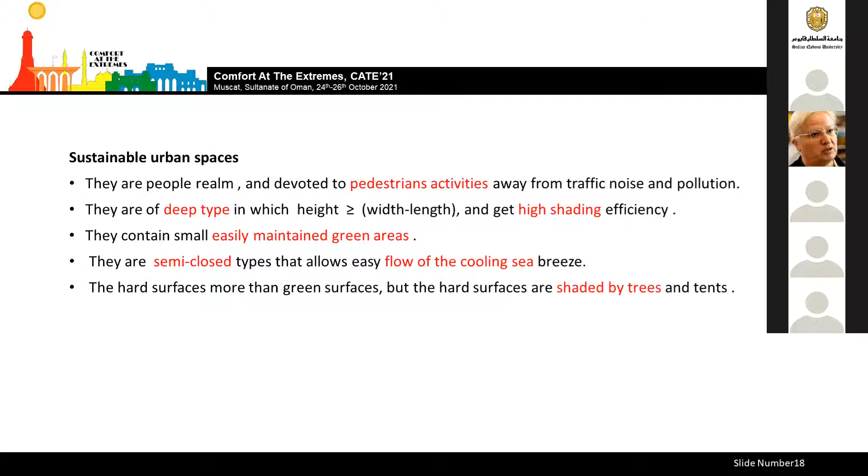On the other hand, the sustainable spaces are all deep, with height greater than width to length, and contain small, easily manageable green areas. They are semi-enclosed and they allow easy flow. The hard surfaces are more than green, but they shade them.

We recommend the following to improve urban space comfort conditions and activate them. High shading efficiency is necessary; we cannot work without shading. This is achieved by usually deep urban spaces elongated on the east-west axis. The building blocks on the south of the urban space should be higher than those on the east-west. Supplementary shading is absolutely necessary and must be provided by trees and tents.

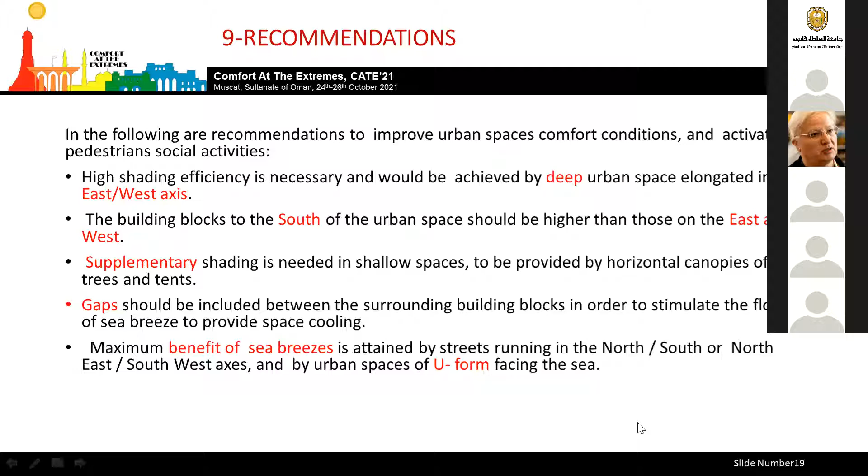Gaps should be included between the surrounding building blocks in order to stimulate the flow of sea breeze. Maximum benefit of sea breeze is attained by streets running on the north-south or northeast-southwest axis, and by urban U-shapes. The landscape, again, must be utilized to provide a shading effect. We must have small green spaces to accept the challenge of water. Hard surfaces have to be larger; we have no choice, but they must be shaded. Housing neighborhoods could follow the traditional oasis by being introverted.

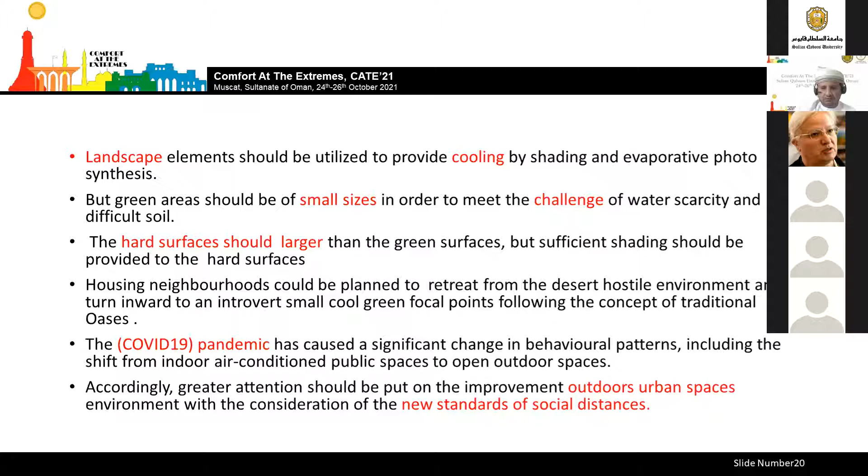Again, the COVID-19 pandemic has caused significant change in behavioral patterns, and there will be a shift from indoor air-conditioned public spaces to outdoor. Therefore, greater attention must be given to improve the outdoor pedestrian space environment and set new standards. Thank you very much.